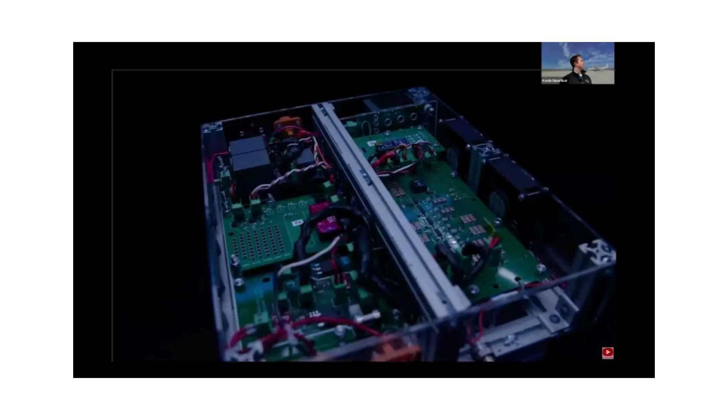This converter enables us to condition the power on the airplane and provide lighter weight electronic systems across electrified aircraft. These kinds of projects are really important for the industry and for Ampaire. At the leading edge of aviation, we are taking electric vehicle technologies and applying them into aircraft in ways they've never been used before.

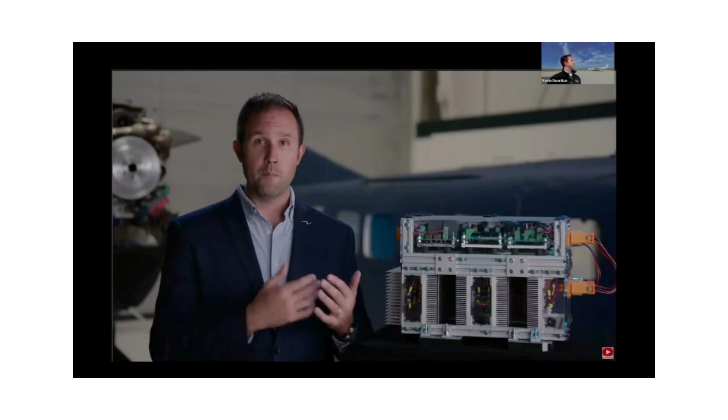This comes with a lot of challenges. Some of those challenges are about bridging the gap between the state of the art and aviation flight ready. This is why it's so important for us to have a flying test bed where we've partnered with the Department of Energy, ARPA-E, in enabling new technologies to be flight tested through our system. Our aircraft is reconfigurable, so we're able to take power electronics, batteries, motors, software systems, even de-icing systems on the wing, new technologies uniquely enabled by electric vehicle systems, and mature them across the board so that they can become ready for commercialization too.

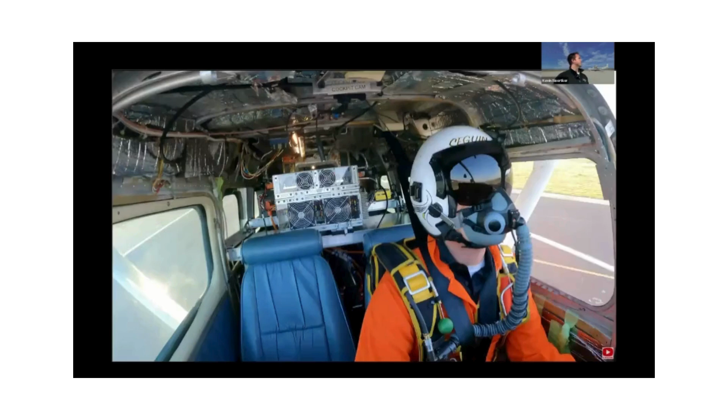As Ampaire looks at the future of aviation, we know that we're not going to be able to do it all on our own, and we need to build and support an ecosystem of innovators to come along with us. So we're excited that UCB was able to fly with us too.

And that's just one example of a project which we're very proud of. This idea of partnering with the ecosystem, being part of it, is also part of why I'm excited to be here. It is about reinvesting our energy into the next generation of technologies, the next generation of the workforce, into the next generation of startup companies that are bringing new tech and solutions into the world. I think that everything we do is built in context, and the more we're able to interconnect and support, the better the world will be.

I think deeply and broadly about the future of flight, and a lot of people do. Many of my peers in the industry will agree on this idea of building a quieter, cleaner, more connected and lower cost future for aviation. It's like an amazing dream that a lot of people share.

But the reality of the world is that we have some very real constraints that hold us back. So what's currently holding the industry back today? Well, there's some practical challenges. Airplanes are very challenging to design brand new, especially when there's a ton of uncertainty underneath it.

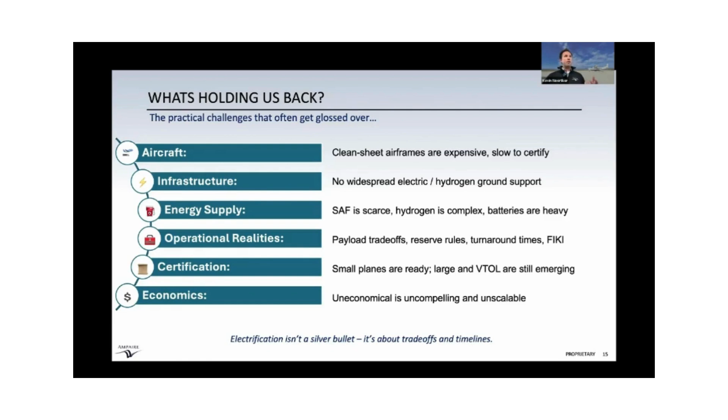And then finally, what are the economic conditions? Flat out, if it's not economically compelling, it's not going to scale globally. So some people look at electrification as a silver bullet, but we really see it as a set of trade-offs and timelines which need to inform a strategy.

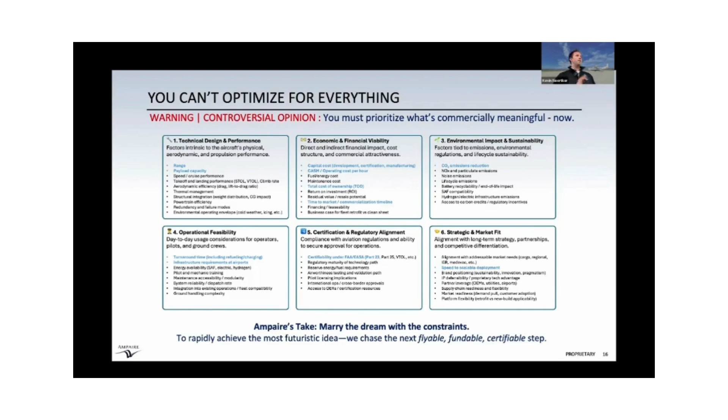I have very strong opinions on the right way to approach things, and I believe it's important to prioritize what we can do today. It's important to ensure that aligns with where the future is headed, and that you're building a bridge to that future, but that you're not so enamored with the vision that you forget about the pragmatic real world steps that have to happen now. So we look at the future, but are always focused on the next flyable, fundable, and certifiable step across all of the factors that you might optimize for.

And that's exactly what we see with hybrid electric aviation. We're excited about it because it can apply across all types of planes. In small planes, it looks like propulsion. In big planes, it looks like onboard auxiliary power. In all of these cases, you're able to save a significant amount of fuel, through the energy efficiency of the overall system and how it's operated on the aircraft. You're looking at 50 to 85% fuel savings. So it's transformative, especially given that fuel is airlines' single greatest expense.

Now, in the long term, there's some really interesting efficiency that can come with new airplane designs. Distributed electric propulsion, vertical takeoff and landing, boundary layer ingestion - a whole lot of exciting things that are uniquely enabled from a vehicle architecture once you get the propulsion right.

When you get those efficiency gains, massive market expansion is possible. So a lower cost leads to expanded opportunity. You can scale the market size, just filling in the blank space of where it's not economical today. But then you can also help commercial aviation continue to grow in a world-positive way.

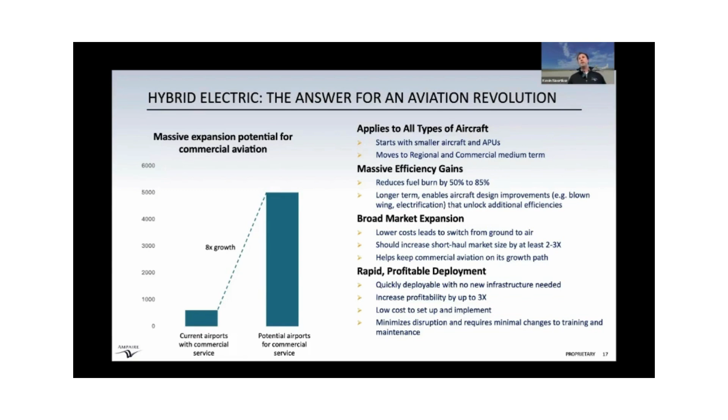That, plus the fact that there are no inherent limiters like poor economics or lack of infrastructure that hold back hybrids, is why we're so excited about hybrid as the gateway technology for the future of electrification in the space. Aviation is not the first mode of transportation to go hybrid first and then transition to electric. We saw this for the first decades of electric vehicles on the ground, starting with infrastructure-independent Priuses and then scaling to other hybrids before you started to get your Teslas and Rivians and others that are now more common. But still today, if you go to rural parts of fully industrialized countries like the United States, you still won't have a plug within 100 miles of you.

What that means is there continues to be real markets and real need for fuel efficiency, but in the hybrid application. What's particularly exciting is that hybrids have been a gateway technology for the fully electric, whether it's the batteries, the power electronics, the motors, the software, the controls, or all of the built-in infrastructure around an industry. So the supply chain, the regulatory approvals, the maintainers in our industry, the pilots - these things are the inertia which ultimately enable you to carry from hybrids into a future of fully electric or hydrogen or wherever the future might lead.

So going one layer deeper here, not all hybrids are made the same. They're actually quite different architectures. So it's overly simple to say hybrids are good, because there's a wide variety. I'm going to go through a few different types of those hybrids, three in particular: an independent parallel hybrid, an integrated parallel hybrid, and then a series hybrid.

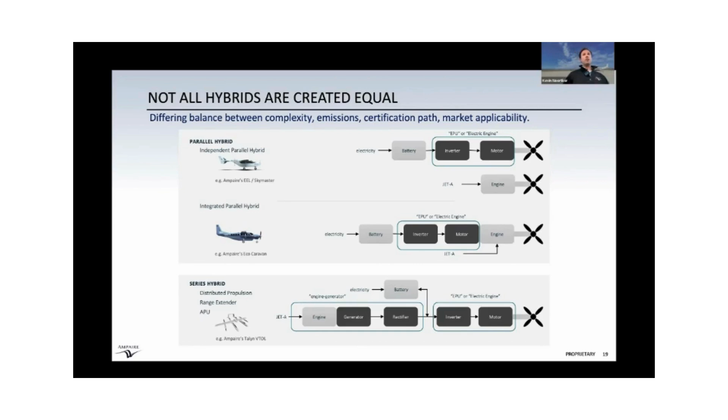But if you were to take those two systems and marry them together, now you have an integrated parallel hybrid, where both systems are providing mechanical torque to the output of the system, in this case turning propeller. But if you removed that propeller and just took that generator set, now you're actually able to use it as producing electricity or electrons that then can flow and be distributed for a whole wide variety of applications, whether that's onboard power, or maybe it's your vertical takeoff and landing distributed electric propulsion, blown air over the wing, or a lot of interesting configurations with planes.

So when you're designing an airframe, and maybe someday someone here will be looking at building, designing, or doing the trades on a new aircraft type, you'll probably be doing a lot of systems engineering, looking at all the constraints and interfaces - and that all begins with what the mission is. Why am I doing this in the first place? Why should this plane even exist? What is the ideal architecture for that system? It's an energy optimization over the use case. And then ultimately, each of these types of architectures is good for a different reason.

Sometimes they're easy to retrofit into old planes, like how we're starting as a company. Other times they're great for distributed power. In certain cases, it's about a trade-off between the range that the plane can fly fully electric compared to the amount of fuel that it's burning with the hybrid system.

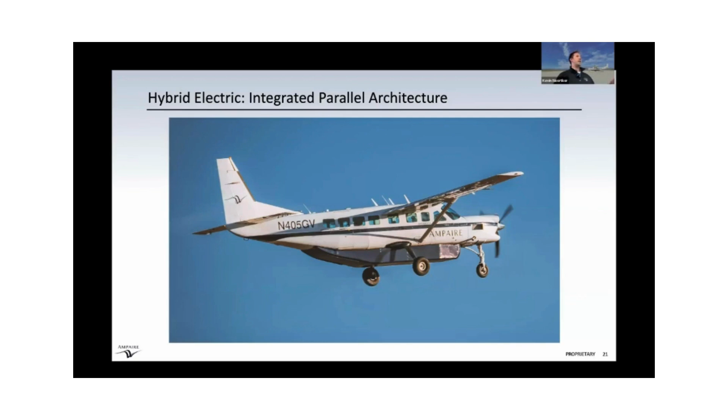Taking that one layer even deeper for these different types of hybrid systems, I'm going to walk through some cartoons on real world projects and how their hybrid propulsion systems are architected.

The first is actually an Ampaire product. This is our launch product, you saw it in some of those videos flying. It's an integrated parallel hybrid architecture. What that means is we've got a jet fuel engine that directly drives the propeller, and an electric motor that's also coupled to that propeller for mechanical output. So you can add mechanical torque to the system with either of the two.

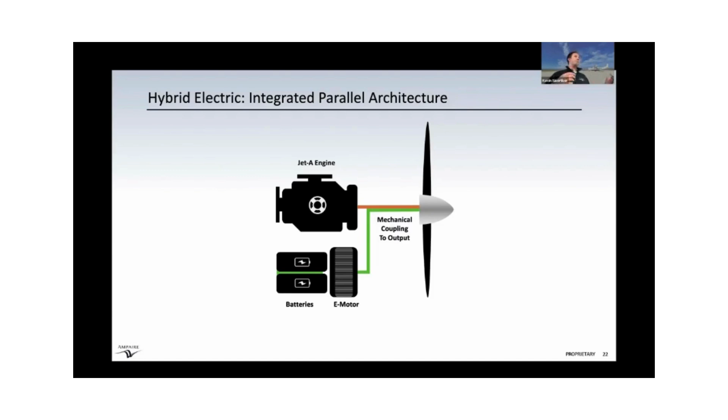What that means is we've got a modest sized battery pack, and how this system ultimately works is that when you're taxiing on the ground, it's going to be pretty quiet, you're going to go all electric. During takeoff, you're going to add power from both systems, the combustion providing the base load of power and all that boost power coming from your electric system. Think about a race car going off the starting line, or your hybrid coming off of a stoplight. Electric machines are great at that torque and power boost up front.

During the balance of the flight, during the cruise phase, because you were able to tailor this combustion engine to be so fuel efficient just for cruise, not requiring the added power for takeoff from the combustion, you're able to recover some of that base load of power to recharge the batteries during cruise, landing with a full battery pack, enabling a very rapid turnaround and a whole lot of utility, while saving between 45 and 50% of fuel over the course of the operation.

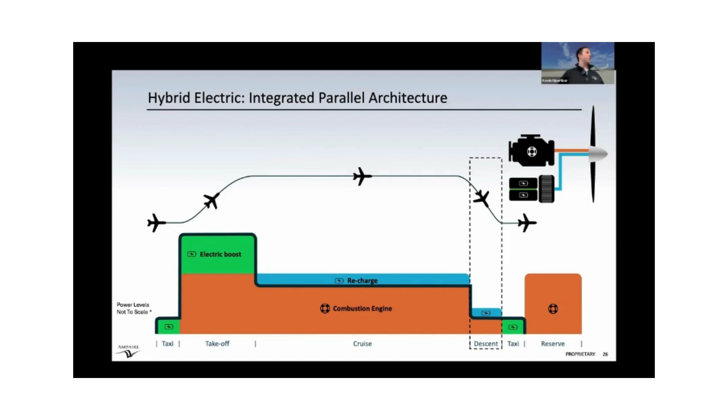So that's what we're doing at Ampaire, but it's not the only solution out there. There's another company doing a primary electric with a series hybrid range extender feature. That company's named Heart. They really are leaning heavy into all electric operation, and then saying, hey, we'll fall back on a range extender to give us a little extra power if we need to fly further.

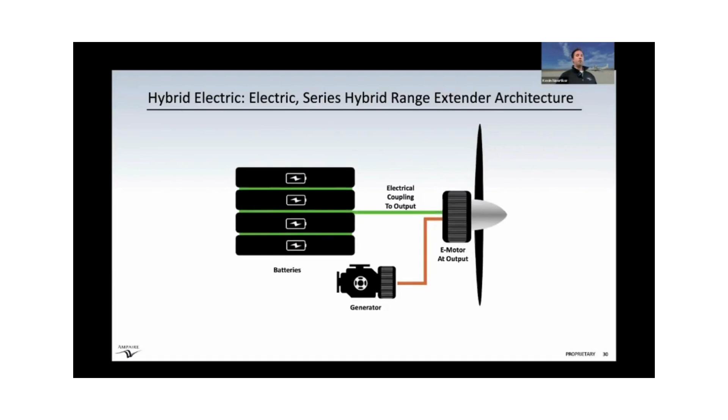So what this looks like is a giant battery pack that provides electricity to a motor, or multiple motors, that turn propellers directly. There is a small combustion engine in there, but it's just used as a generator during the occasion that you need a little bit more power than the batteries can provide. So in this case, all of your nominal flight, whether you're taxiing, taking off, or cruising, is spent fully electric.

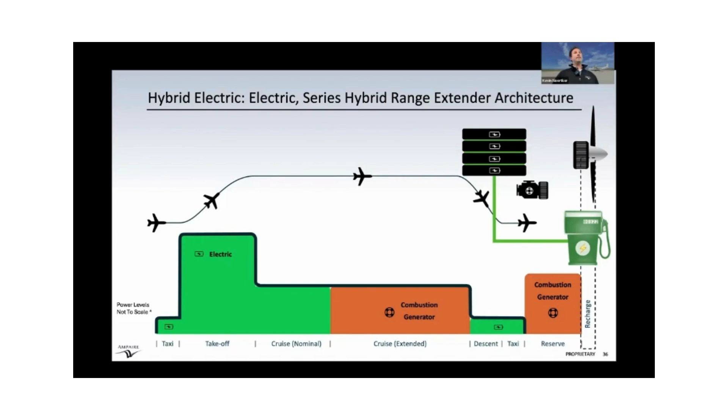You're carrying that big battery, you ultimately deplete it. If you needed to go further, now you're using your generator to extend your range a little bit, and then you descend. The challenge they run into: one, those batteries are crazy heavy, very challenging to put into planes. The other is that when you land, you need to refill the plane, and you need to refill it with electricity. That means you need charging infrastructure, grid upgrades. If you need to turn around quickly, you're looking at megawatt class charging infrastructure, which somewhat exists, but it's relatively challenging to get integrated at airports, and ultimately adds a barrier to adoption.

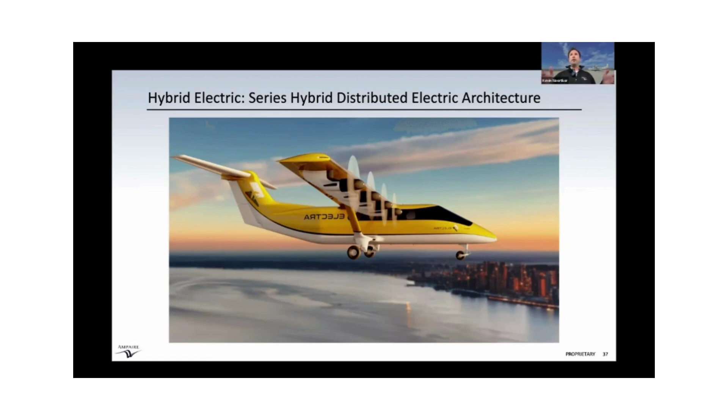The last hybrid architecture I'll go through is a series hybrid enabling distributed electric propulsion. This company's name is Electra Aero, and they have a clean sheet design plane which has propellers all across the wing. It's very aerodynamically efficient if you can accelerate the air over the wing, and so they're able to take off and land from very short runways with this type of feature.

So what this looks like is a primary generator as your source of electricity, with a little battery backup for when you need an extra boost, and those provide electricity to the distributed propulsion units across the wing. During this, you always have that base load of power from your generator, though instead of providing mechanical output like it did in the integrated parallel, it's actually providing electrical output the entire time.

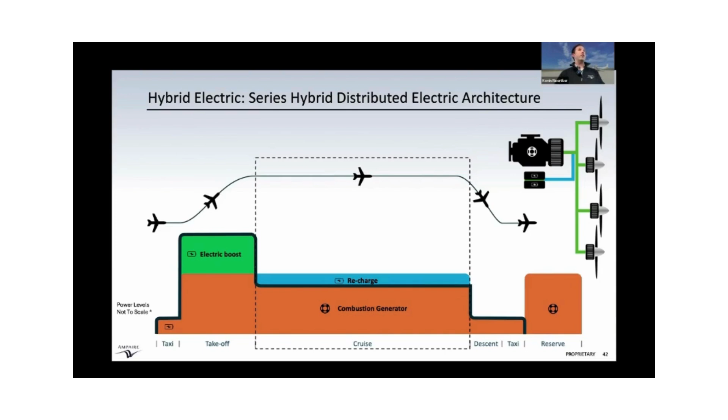During your takeoff phase you need a little bit of extra boost, so maybe you're pulling from a battery pack there. Then during the balance of flight, maybe you're recharging that battery pack, landing with a full pack, but primarily using your generator for your series hybrid architecture. And then at the end of the day, this type of plane might not need to plug in as well.

So those are three out of, there are probably like 6 or 7 common architectures that you might see being used in aviation, mostly in concept. But one of the things I love about Ampaire is we're far beyond concept. We've been at it for nearly a decade now, and we're flying the world's largest fleet of hybrid planes. We've done these different iterations, we've explored these different options. So now I'll deep dive some of the other factors very specifically to our product.

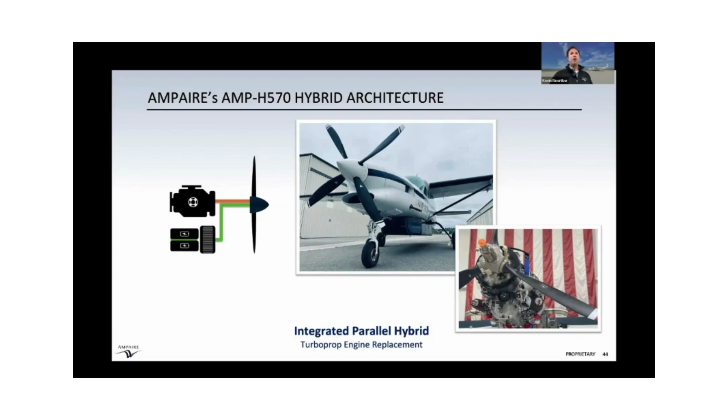Again, that integrated parallel hybrid - this is a turboprop engine replacement, the first example I walked through. You can see it here, both - we're an aerospace company, so in front of an American flag, and then also in the nose of our launch product, which is a Cessna Grand Caravan, a system that we've flown and which we're already operating.

So why do this? Why would our customers buy this system? Compared to the alternative they fly today, when they burn half as much fuel, they triple their profitability. These are businesses that scrape by with small margins, struggling to stay in business because of how volatile fuel prices are and how challenging it is to make ends meet as a small airline operator. When they switch to our system, they triple their profitability. It's game-changing for them economically, setting aside the benefits for the world from burning half as much fuel.

So then they compare us, not just against the original conventional Jet A engine, but against all of these novel technologies coming out, and they're deciding: do I go hybrid? Do I go hydrogen? Do I go all electric? Ultimately that comes down to them, not to a technology decision - though I love the technology myself - for them it comes down to a decision on the underlying economics. Why go with one solution over another?

This has been really core to how we build the business - optimizing for the full economic scope of impact on our customer, not just how much electricity versus how much fuel, but looking at maintenance costs, looking at the vehicle cost - how much you paid to buy the plane, to buy the propulsion system, to upgrade the charging infrastructure, to source all the fuels. When you look at the relative impact, what they generally look at is their net income, but you can also look at total expense, capital expense to buy the systems, or cost per available seat mile. At the end of the day, we did the trades to choose what was most economically compelling and viable to our customers.

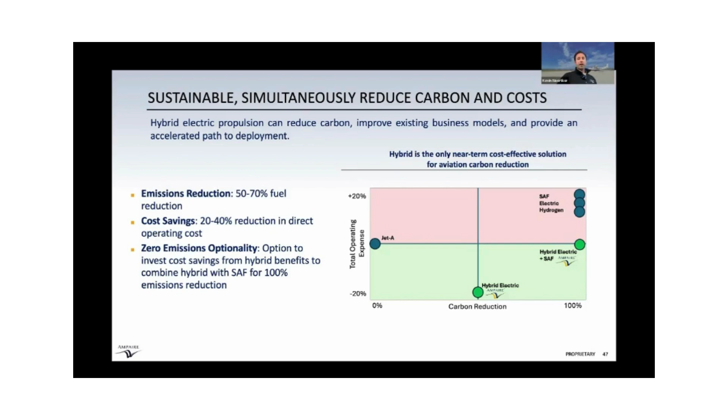Safety is at the heart of aviation. Our customers, and anyone who sets foot in an airplane - some people take for granted, but we really shouldn't take for granted just how safe airplanes are. It is 1,000 times safer to fly on a plane than to drive to the airport. The numbers play out that aviation safety is second to none. And when integrating brand new technologies, that's a consistent expectation - a new technology must be at least as safe as what was already there.

This is really interesting from our standpoint, because this integrated parallel hybrid is different than other hybrid architectures - you have that combustion engine underlying the system and actually providing a direct mechanical output to the propellers. If you had the whole electric system die mid-flight, you're still able to fly home safely on that combustion engine. Now that's almost like a letdown - you're like, but I want the electric to be more meaningful. But the electric gets you the opportunity to optimize that combustion engine alongside the electric boost and get this holistic savings.

It gives you layers of fault tolerance that were never possible in aviation before, which means that with this kind of safety case, we can go to the regulatory bodies and show them that not only are we meeting the safety criteria that the original technology had, but by adding in the new electric stuff - the things they might be afraid of - we're actually increasing the level of safety. This gets deployed for millions of flight hours and miles, and that ultimately turns into trust and data, which underpins every subsequent deployment of electric technology - not just this first step of a hybrid where we were able to fall back on combustion, but eventually when electric is your primary safety.

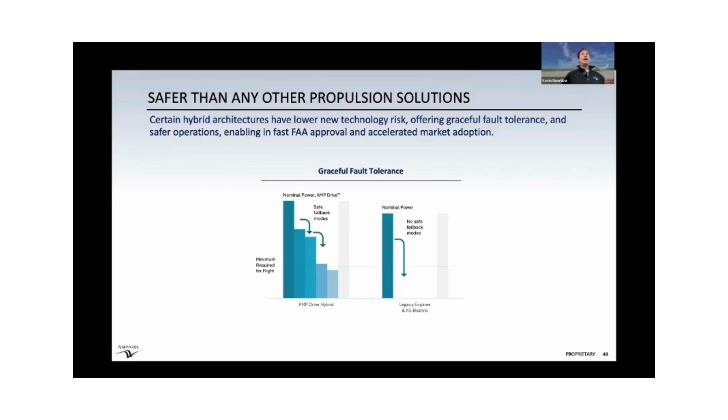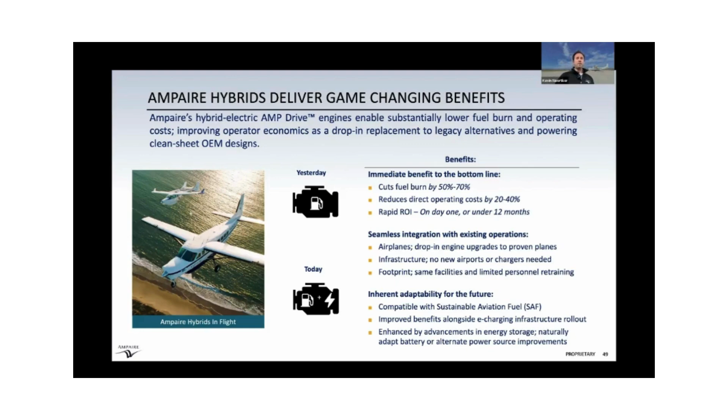I actually think electric systems are going to be more safe than combustion, but it has to be proven. This is our chosen pathway: navigating all the constraints for proving it out faster than the rest of the world, building our place in the industry and market, and then enabling us to deploy the next generation of technologies thereafter. I think it's a great way to spend my life, building systems that support better economics and growth in an industry, bringing new technologies, solving audacious challenges, and building a capability that's quite exciting for the future.

So a few places we've taken this technology so far. We've flown about 33,000 miles, hundreds of hours flown, demonstrated all the savings. Longest flight was about 1,400 miles, 12 hours.

I'll highlight a few places where we've flown these planes. The first, one of my favorites, is Maui. In 2020, we deployed on what's called an essential air service route. This community in Maui called Hana is served by government subsidized flights that provide essential goods — this is how doctors get out there, how critical supplies are moved.

If you've been to Maui, people say drive the road to Hana — it's beautiful, lots of waterfalls, takes about 2.5 hours, but only do it once, it's treacherous. That flight only takes about 20 minutes, so you're saving so much time. Right now you're flying at somewhat of a premium, but flying electric or hybrid electric, you're actually able to reduce the burden of those flights and increase connectivity to communities like Hana around the world.

We've flown around the country. One of my favorite flights was when I flew up to Palo Alto in one of our hybrids, because, startup company, you've got to raise money. So I told investors, hey, I'm flying into the airport right there in Palo Alto, at the end of Sand Hill Road where all the venture capital investors are. You know what they said? 'We have an airport in Palo Alto?' No one knew it.

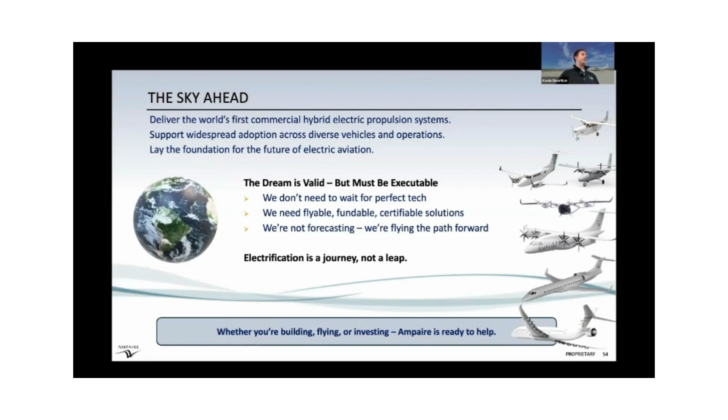This is just the beginning of where I see the industry and where we see the company going. Our goals coming up soon are to deliver the world's first commercial hybrid electric propulsion systems, to support widespread adoption of electrification — starting as hybrids, but then going elsewhere — to lay this foundation for the future of growth in the industry. I think big dreams are valid. I dream big dreams, I ask what if, but I also think you need a plan that's actually executable in the interim, and that it's a journey, not just one big leap.

So in the last few minutes I have here, I'm just going to zoom out a little bit. I went through a bit of my own background, talked a bit about the company, got into some technical details, and talked about the optimizations we made and why.

They're decision points that we face through life. This is like putting myself back 20 years ago, when I was just entering school as somebody who kind of wanted to solve the theory of everything, or maybe be an astronaut. And I was like, where am I going to go? I don't know.

Do I do physics or engineering? Do I do research or internships? Do I go into academia and get my PhD, or do I go into industry? Once in industry, it was, do you want to be on the R&D team, which is cool technology but not implemented? Or do you want to be on the programs where you're actually working on the vehicles themselves, the end use products? Do you want to be an engineer, or do you want to be management, whatever that means?

So do you want to turn into a leader, whatever that means? There are questions that you'll ask yourself over time. For me, it was, do I want to do airplanes or space stuff? Or what's next when being at a big company wasn't filling my bucket?

And then starting a company, there's an infinite number of questions I have to ask myself every day, down to like staring at your hand, like why am I here and what am I doing, to what's really possible, what's changing in the world around us, who cares about this, why are we spending our time given the constraints, what can we really do, how do I prioritize those things, because you can do anything you want in life, but you can't do everything.

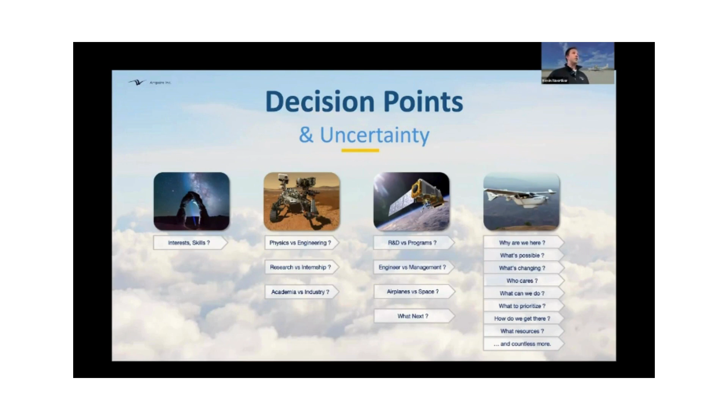How do we get there once you choose where to go, and what are the resources you need, and just infinite more questions. So you can't have answers to everything.

So you need to have good principles by which you make decisions. Your good decisions won't always turn out right. You'll roll the dice, and even if you've weighted the dice in your favor, or your coin flips 60% in your favor, 40% of the time it's going to be not in your favor.

And you will then say, am I making bad decisions? I got it wrong. Well, if you're basing your decisions in life on good founding principles, then it's not a wrong decision, even if it didn't turn out the way you wanted it to. It's just the 40% that didn't play out, and that's expected in a stochastic type situation.

I'm always looking for meaningful, challenging, visible work. We all have a very little bit of time here on Earth, and I'm going to have as big of a positive impact as I possibly can. It better be meaningful. Challenging, because I'm always up for a good challenge, but that's also how you find the limits of the possible.

There's another great quote out there, like the way to find the limit of the possible is to dare to step into the realm of the impossible. And pushing that boundary is how you actually learn where the boundary is. Most people live their lives in this 35 to 55, 60% range, never daring to push to 110. You have to find yourself happy to be uncomfortable, pushing just a bit into that challenging area.